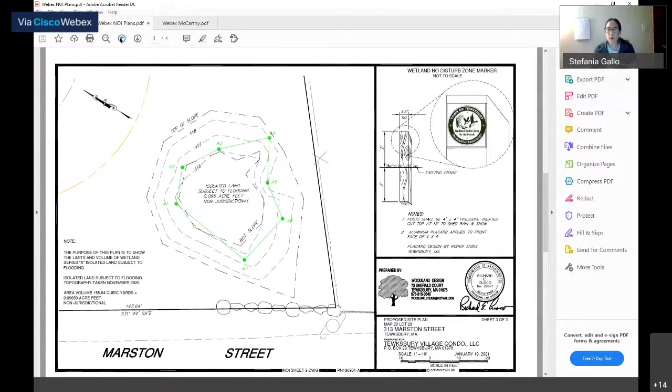And then the other question I had is, do you need to go to the ZBA for the side setbacks? Okay, I just want to make sure. Yeah, I think it's 16 feet. Actually, the one thing I would note is that the applicant is probably going to build a house that's slightly smaller than that one. But at this point, I said we'll show this dwelling—I think it's about 6 feet shorter across the back from what they're telling me they might want to build.

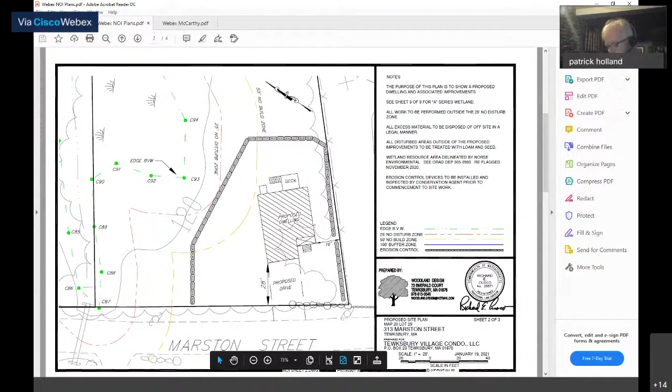I'm going to go to board members now. Any issues, Mr. Ronan? No issues for me. Mr. McMullen? No questions. Mr. Sheehan? What size lot is that? A full acre. Okay, I'm fine. Mr. Walsh? No questions.

Now, you said he was going to give some square footage to the town for the park or something? Yeah, there's about 8 acres back here. Okay, so it has nothing to do with this acre lot. I just wanted to bring it to the commission's attention because they may be asked for some input in the future from the selectmen, and I just wanted you to be aware. I think we have to be careful of what we take these days.

Okay, I have no questions either. It's well within, he's not in the 50-foot no build zone. Again, I have no issues with it.

Okay, I'll entertain a motion to approve the notice of intent for Gary U. Hodges Revocable Trust, 313 Marston Street, map 20, lot 29, DEP number 3051127, with the standard order of conditions. Stefania, do you need to add anything else in the standard order of conditions? Do we have the zone markers in that?

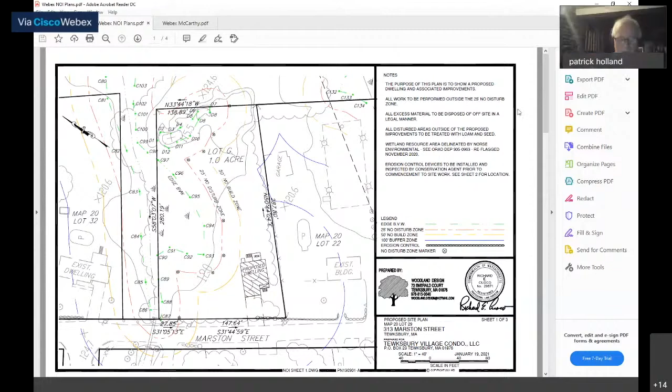Mr. Ronan, how do you vote? Aye. Mr. McMullen, how do you vote? Aye. Mr. Sheehan, how do you vote? Aye. Mr. Walsh, how do you vote? Aye. And chair votes aye as well. Thank you, Dick. Okay, thank you very much. All right, now where am I?

That was G. Okay, now we're on to H. Request for non-substantial change, order of conditions, Woodland Design, 325 Marshall Street, lot 1A, Terramor Drive, map 32, lot 3, DEP number 3051107. Is there anyone here for that?

Thank you, Mr. Chairman, Dick Cuoco here again from Woodland Design. The project as approved had the location of a garage situated on lot 1A. What I did was take the plan you see in front of you, the proposed garage location, but to simplify this, I superimposed the one that was approved on the notice of intent plans in red. So when they went in to get sign off for the building permit, it was different than the approved plan. Stefania asked us to come in and show it to the commission and ask for a non-substantial determination on this.

We're actually a little further away from the wetlands on this side, and it's well outside the 50-foot buffer zone for this little small pocket of wetlands in here. So that's pretty much it, sir.

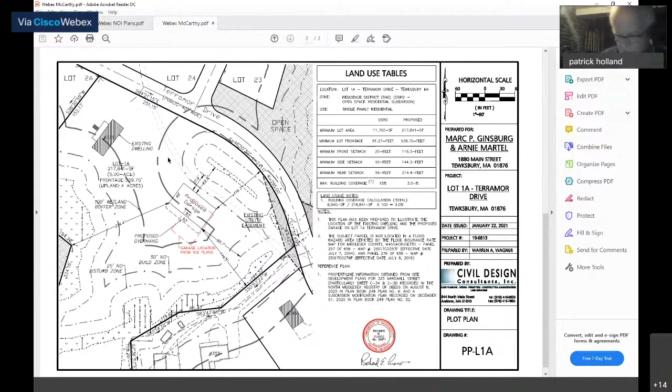So moved. Can I have a second? Second. Mr. Ronan, how do you vote? Aye. Mr. Walsh, how do you vote? Aye. Mr. Sheehan, how do you vote? Aye. Mr. Walsh, how do you vote?

You asked me twice, Mr. Chairman. McMullen or Mr. Walsh? Did I already ask you? You asked me second. Oh, who didn't I ask? Mr. Ronan? You did not ask me, Mr. Chairman. Okay, how do you vote? Aye. Chair votes aye as well. He feels left out. Yeah, it's because I'm getting confused. I'm doing too much talking with all these continuances, I'm starting to lose my voice here.

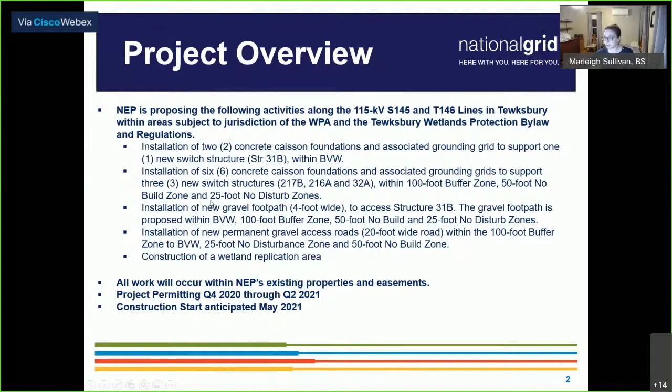Here I showed an example of what the proposed switch structure within the wetland resource area is proposed to look like. Here you see an approximate 4-foot diameter concrete foundation. This is before they actually install the structure pole itself.

Within the wetland resource area, there's a proposed 6x6 gravel pad. This gravel pad is intended to serve a few purposes: restrict vegetation within the area of an electrical grounding grid, as well as restrict vegetation growing up to what will be a hand-operated switch handle, which will only be on one side of the structure. So here you can see the gravel pads on one side, the switch handle that will need to be hand-operated will be on that side as well.

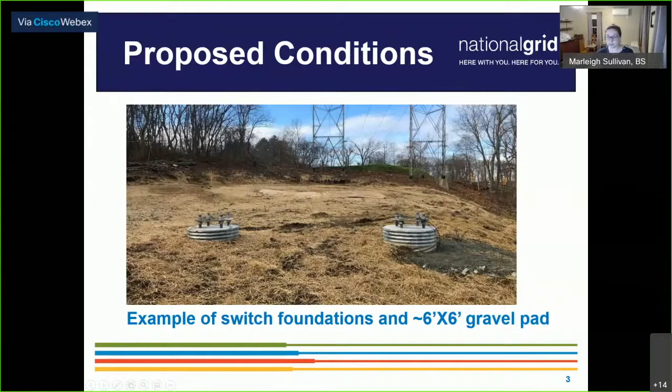Here's an example of within the upland resource areas, gravel pads will occupy an approximately 10 by 30 foot gravel footprint. This is the typical gravel footprint for the gravel pad, but it was reduced to a smaller footprint for the sensitive resource areas. With this larger gravel pad, it'll also restrict vegetation within the upper components of the structure. These structures are 18 feet tall and are connected to the existing structures overhead, so since they're only 18 feet tall, they want to limit vegetation that might conflict with the overhead components.

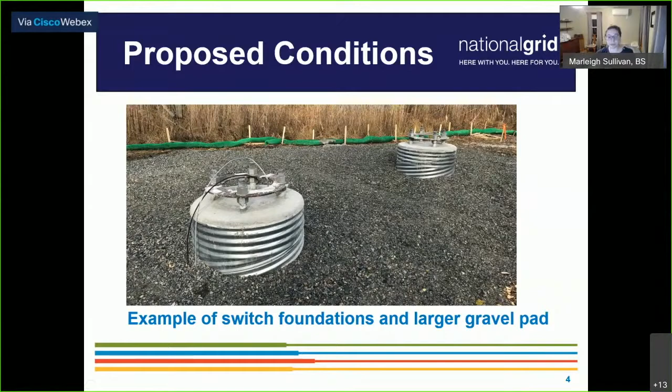Here we have a summary of the proposed impact areas. While you look over it, I can point out some of the key points. Within bordering vegetated wetlands, we have 2 concrete caisson foundations, each 4 foot in diameter, their associated 6x6 gravel pad, and a 4-foot wide gravel footprint. Within the 100-foot buffer zone to BVW, the locally regulated 50-foot no-build zone, and the 25-foot no-disturbance zone, there will be proposed gravel pads, new access roads, and 4-foot wide footpaths.

Here we can see the first location, north of Crossing Street. You can see here we have a proposed permanent access road, the new switch structure, which is associated with an existing structure right here, and one switch structure located within the wetland resource area with the smaller 6x6 gravel pad and a 4-foot wide footpath within the last little portion leading up to where the switch will be hand operated. Across the street, all of the work is only within the 100-foot buffer zone, and it's also within that last 50 to 100-foot portion of that buffer zone.

Again, we have a permanent access road, permanent gravel pad, and 2 new switch structures. The larger work pad area will be a temporary graded surface for the purposes of construction.

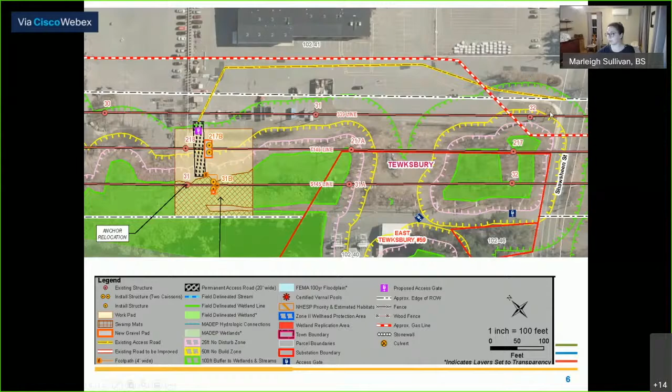So the next location that was available is over here. Another component of the design is that they can't have the switch structures too far away from the substation. In an emergency repair situation, they need to be able to turn off the electrical grid for safety reasons and to reduce the number of customers out of service during those repairs. The further away the structure is from the substation, the more time people have to wait for repairs. It also makes it challenging or impossible for engineers to identify what location may have been damaged in an emergency, because it's harder to isolate that location.

So, long-winded answer. Are there any other questions?

Or I feel like you can't hear us. Can you hear us? Yes. Okay, because we couldn't see your cursor, we couldn't see where you were going there. So they're adding an access road over here, right beside your house. Right beside my house. So they're adding an access road there.

So this is the only location, is what you're telling us, that has to land on our property. This is crazy. Where do we draw the line? We've had so many issues with the power company to our bodies, physically, with these lines that are here. Where does the line get drawn that we have any say in anything on these projects? It's like our hands are tied. They continue to do and add what they want. Meanwhile, we now have natural gas pipelines back here, and you're going to add other stations here, and our kids play in these yards. It is still my property, even though it's an easement to the power company.

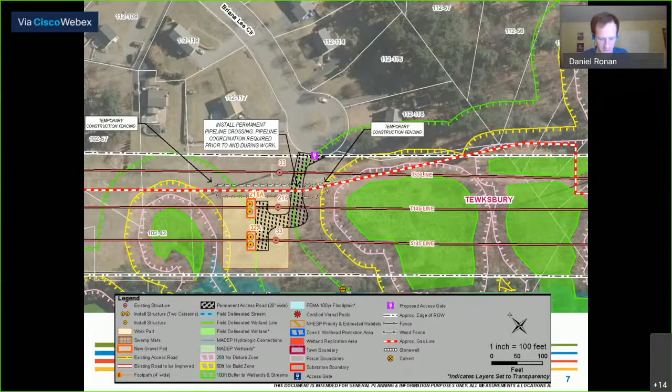Okay, Mr. Ronan, any questions? So, commenting on the resident concerns, I'm looking at the front elevation, which shows a side view of what the structure is going to look like, just to give an idea of how tall this thing is.

So here, I'm going to share it. The depiction I have available is the profile view of the switch structure. It's only 18 feet tall. I don't know the height of the existing structures, but they're much taller than 18 feet.

Here you can see the foundations, and here we have the grounding grid area where there would be the 6x6 gravel pad. Here's a top-down view, you can see the 6x6 foot area where the grounding grid is again, where we'd have the gravel pad and wetland.

Again, this is not really the purview of the commission, but detail E is where the actual hand switch is, correct? Yes, I'm not sure if you'll be able to see this clearly, but the switch handle is right here. They're hand operated. I'm assuming there's something that prevents anybody from just going up and operating it. They have locks on them, and nobody will be able to operate it unless they have the proper equipment.

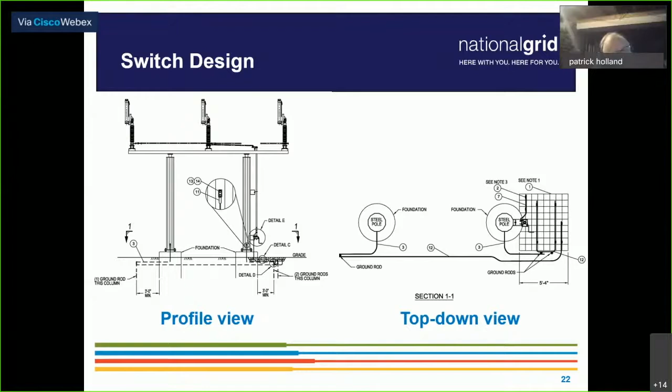Okay, so what language did you take out? The changes she made are what I sent to the commission. Oh, okay, so I accepted all the changes you made to the document. All right, I have no issues with that because I don't want to read the entire thing.

And this is in the public documents, correct, Stefania? Yes, this will be in the public record. Okay.

I will entertain a motion to approve the notice of intent, Andrew Cole, New England Power Company. Actually, Stefania, do you have any issues before I move on? You just turned around and sent me all this, the order of conditions. So do you have any concerns? No, I met National Grid and Marleigh on site the other day, went through all my concerns and questions with them. We talked about my biggest concern, the replication area, and they described to me exactly what they described to you, that there's no other place to put it but the location they chose. So everything has been addressed.

Okay, all right. With that being said, I'll entertain a motion to approve the notice of intent for Andrew Cole, New England Power Company, NEP, S145 T144 transmission line row, map lot 3437, 10241, 10258, 1121, 1124, DEP number 305, 1128, with the standard order of conditions, and also including the conditions that Stefania has published dated February 5th, 2021.

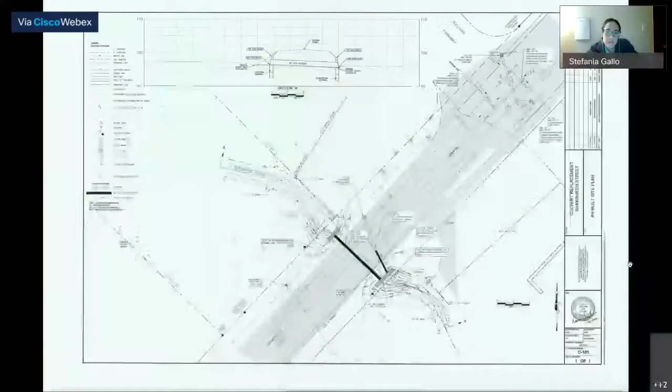Stefania, what do we got here? Andrew Stack is here. Oh, yes. I don't know, let me see if I can chat. While we wait for... oh, here he comes. Okay. Is he on mute? I don't know. It looks like it. Yeah.

Andrew, can you unmute yourself? Hello? Hi. Oh, there you go. Yep, now we can hear. Okay, yeah. All right, introduce yourself for the record, and the floor is yours.

Good evening, Mr. Chairman and commission members. I'm Andrew Stack with the DPW Engineering Division, here to request a certificate of compliance for the culvert replacement project near 31 Shawsheen Street. The project is located on Shawsheen Street in the right-of-way near house number 31, by the Billerica town line and Shawsheen, also near Sullivan Parkway. The original culvert was an 18-inch diameter corrugated metal culvert, which conveyed flows from this intermittent stream beneath Shawsheen Street.

This upstream head wall failed, and the side slope of the culvert failed in November of 2014, and emergency repairs were made at that time. The project I'm requesting a certificate of compliance for is the permanent replacement of the culvert. The 18-inch diameter corrugated metal pipe was replaced with an 18-inch diameter reinforced concrete pipe culvert. New precast concrete head walls were installed on both the upstream and downstream side of the culvert, and the 12-inch corrugated drain pipe was replaced with a reinforced concrete drain pipe.

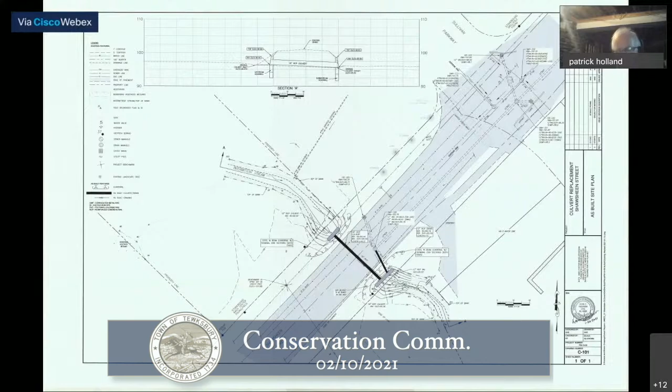Okay, I have no further questions. Stefania, any issues? I don't have any issues. Okay, and board members had nothing.

This is not a public hearing. This is a request for certificate of compliance. So I'll entertain a motion to approve the request for certificate of compliance.

Andrew Stack, Town of Tewksbury, DPW, 31 Shawsheen Street, map 56, lot 127, DEP 3051009. Can I have a motion to that effect?

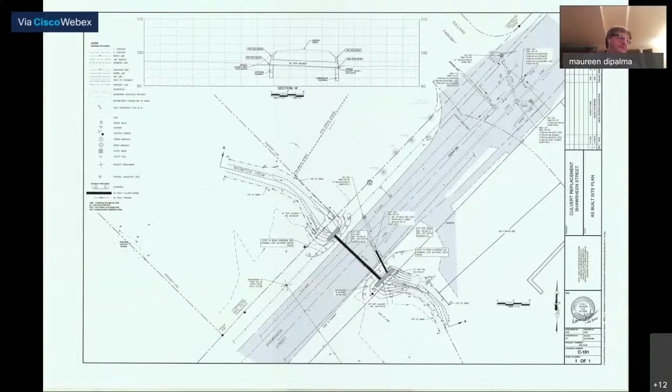So moved. Have a second. Second. Mr. Ronan, how do you vote? Aye. Mr. McMullen, how do you vote? Aye. Mr. Sheehan, how do you vote? Aye. Mr. Walsh, how do you vote? Aye. My chair votes aye as well. Thank you.

All right, now we're on to item K. Public hearing, request for determination of applicability, John P. Devlin, 241 Pringle Street, map 106, lot 59.

Again, this is a public hearing. Anybody interested in participating, the number is 978-771-0819. Is there anyone here for that? Mr. Chairman, for the record, my name is Steve Stapinski from Merrimack Engineering. The floor is yours, sir.

Mr. Devlin is proposing to construct an addition to his house, approximately 24 by 25 feet in the rear of the house. A quarter of the addition is really a deck, and the rest, three-quarters of it, is building. The addition is directly behind his existing house.

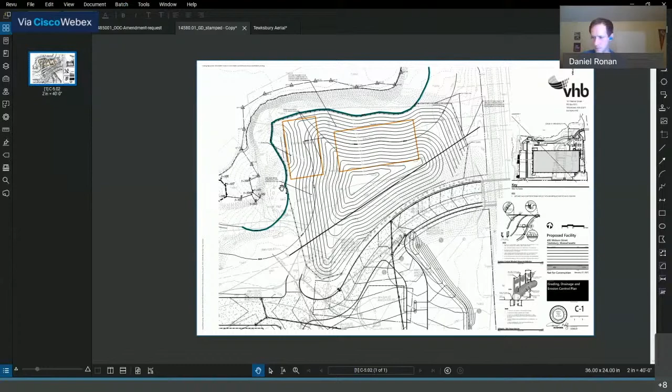Second. Mr. Ronan, how do you vote? Aye. Mr. McMullen, how do you vote? Aye. Mr. Sheehan, how do you vote? Aye. Mr. Walsh, how do you vote? Aye. Chair votes aye as well. Thank you. Thank you for your time.

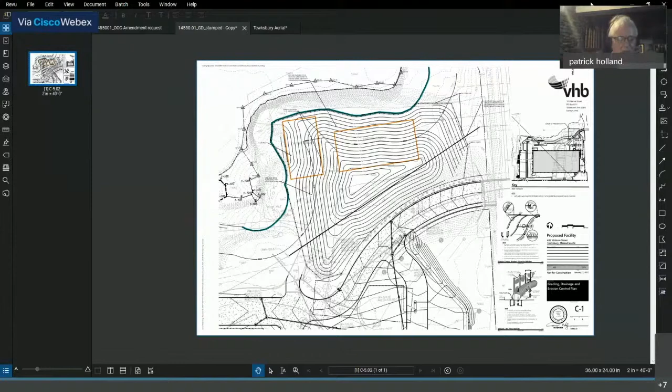Good night. Okay, before we go any further, we need to revote because we didn't close the public hearing for Andrew Cole nor Gary Hodges. So I would like to do that so we can formally make sure that everything's on the up and up.

Back to item G, a public hearing notice of intent, Gary Hodges, Gary U. Hodges Revocable Trust, 313 Marston Street, Map 20, Lot 29, DEP number 3051127. Can I have a motion to close the public hearing?

So moved. Can I have a second? Second. Mr. Ronan, how do you vote? Aye. Mr. McMullen, how do you vote? Aye. Mr. Sheehan, how do you vote? Aye. Chair votes aye as well. And Mr. Walsh? Aye.

Now we're going to entertain a motion to approve the notice of intent for Gary Hodges, Gary U. Hodges Revocable Trust, 313 Marston Street, Map 20, Lot 29, DEP number 3051127. Can I have a motion to that effect? So moved. Can we have a second?

Second. Mr. Ronan, how do you vote? Aye. Mr. McMullen, how do you vote? Aye. Mr. Sheehan, how do you vote? Aye. Mr. Walsh, how do you vote? Aye. Chair votes aye as well.

Now I'm going to entertain a motion for item I, public hearing, notice of intent, Andrew Cole, New England Power Company, NEP S145, T146, Transmission Line Row, map 34, 10241, 10258, 1121, 1124, DEP number 3051128. Can I have a motion to close the public hearing? So moved. Can I have a second?